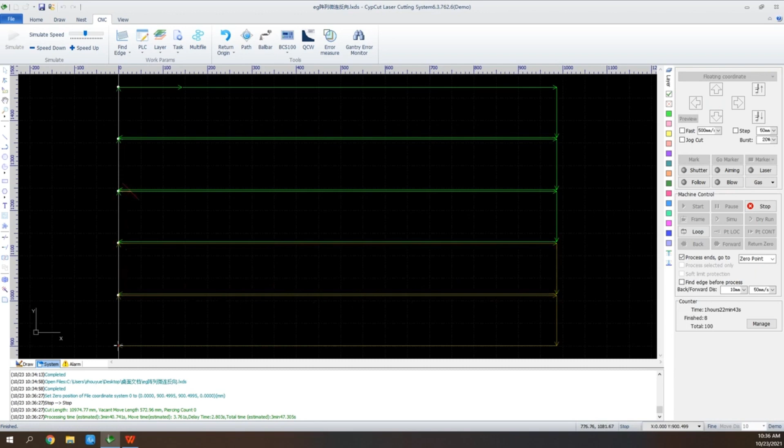We use the reverse to change the direction of the cutting path. So now, as the sheet gets better support, it will stay steady while being cut.

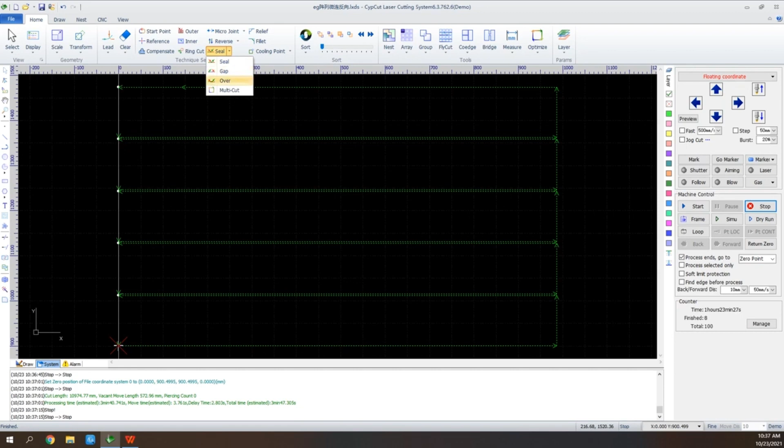Down below, this is the gap feature here. In the drop-down menu, we can see the gap. Select the graphic and click it when we need to set a gap at the end of the cutting path. Here is the gap. On the contrary, we can seal the gap if we don't want it anymore.

There are also overcut and multi-cut. Overcut is for making sure the whole part was machined, and multi-cut is for an obvious marking.

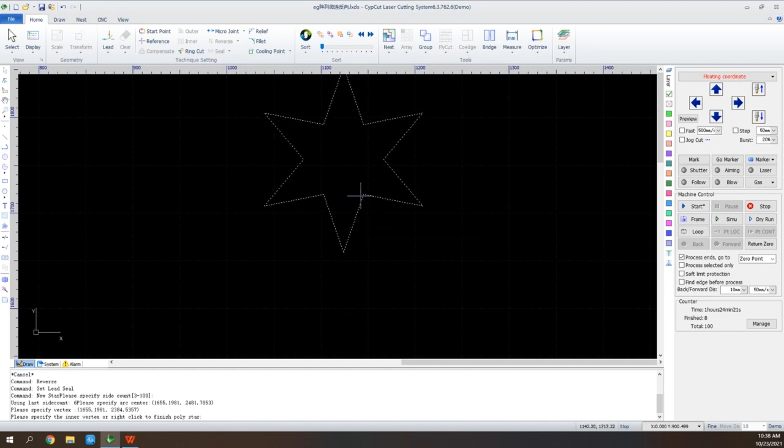Sometimes we need to cut graphics with a sharp angle. To ensure good performance, we use the feature ring cut. As always, we click to set parameters accordingly. Now we get the ring cut.

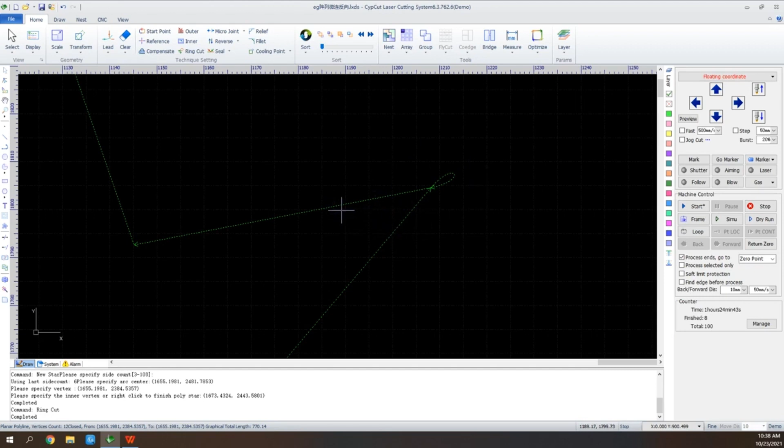And when it occurs to parts with a corner to be bent in the next step, like a standard part like this, we can set relief angle here, manually.

And this fillet feature is different from the one at the bottom left. We can add fillet one by one according to needs.

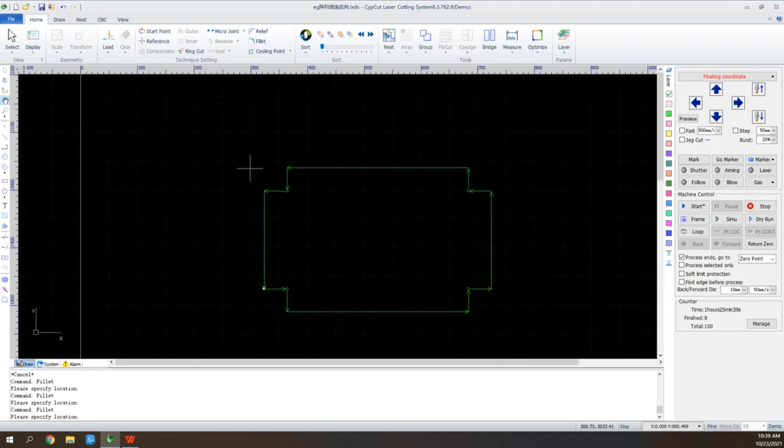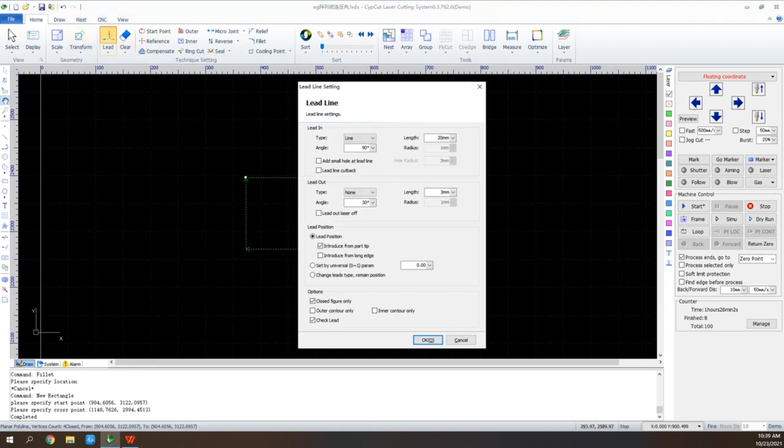When we cut thick plate, at a corner of a graphic or the lead-in, from the tip we need to get the laser off to stop cutting and blow to cool the point in case the part gets melted.

So we can use the cooling point feature. We've got two ways: automatic cooling point and manual ones. Choose auto cooling point, and we'll get every corner and lead-in position a cooling point.

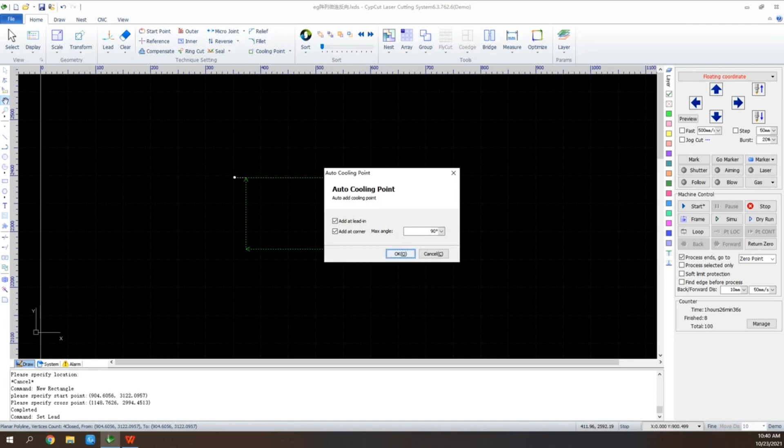And if we click this clear cooling point, all but the one at the lead-in can be cleared. This one needs to be cleared manually.

So we click the icon again, press Shift, and click to clear the point.

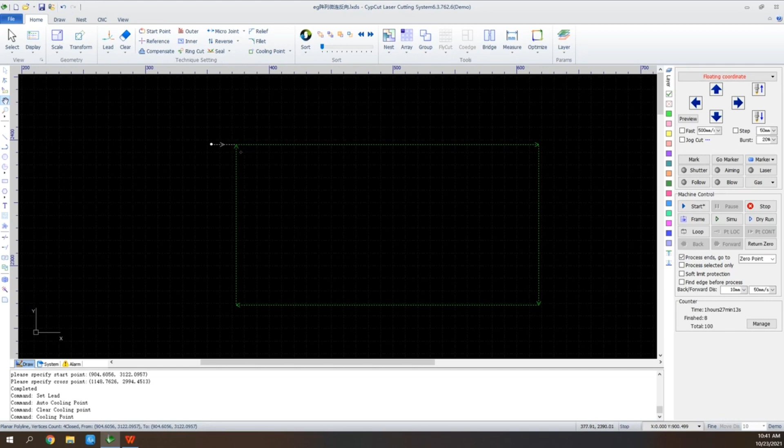And at the end, let's focus on the reference point. As we can see, on the machine panel, the red cross represents the position of the cutting head at the moment.

The white cross is the mouse, and this one is the reference position. The reference point means the position of part 0 in relation to that of the whole graphic.

When we set the reference point at the bottom left, the graphics will show at the top right of the point, as we can see here. And in the floating coordinate mode, the cutting head and the part 0 position is at the same place. So the machine process starts at the top right.

If we set the reference point at the bottom right, the machine process starts at the top left of the point.

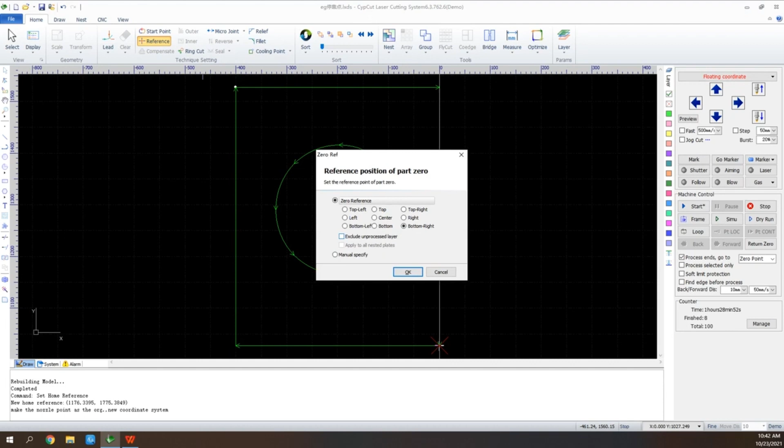There we've got exclude unprocessed layer. For example, there we have 2 graphics. And we now set the rectangle as not processed. And we check this box.

The reference point will be at the bottom of the circle. It means it will start cutting from this circle instead of the rectangle.

And though we can manually set the reference point, relative zero reference is the common choice. The floating coordinate working with zero reference can realize flexible production.

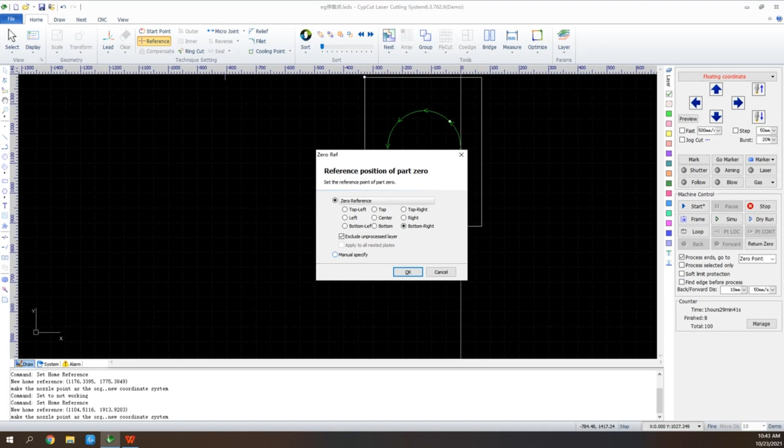So that's for today. We've learned the features in view, geometry, and the technique setting modules, and we know how to draw simple graphics. Remember to practice. See you next time.

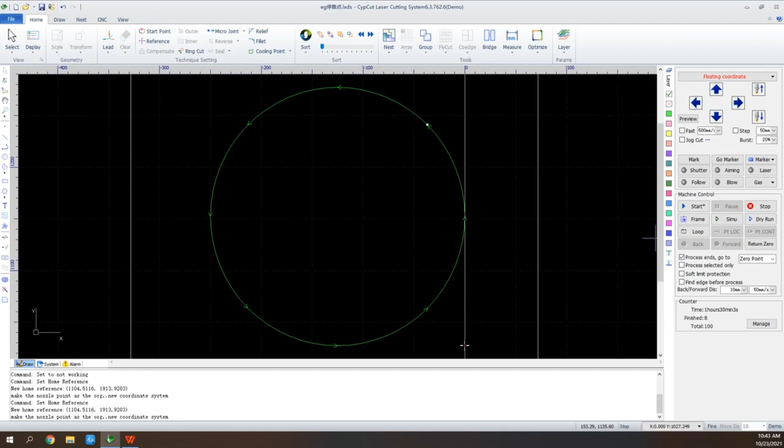Last time we learned about how to draw simple graphics, set cutting techniques, and functions in the view and geometry. Today we will learn the ways of sorting sequence for different graphics and the tools that help to get a better cutting performance. Without further ado, let's get started.

Now see the sort module. We've got all these 11 ways of sorting: grid pattern, local shortest path, cutting die pattern, smaller figure prior, radiating outward, left to right, right to left, top to bottom, bottom to top, as well as clockwise circular pattern and counterclockwise circular pattern.

In general, we choose grid pattern. Left, right, top, bottom — these 4 types are mainly used for cutting well-arranged graphics.

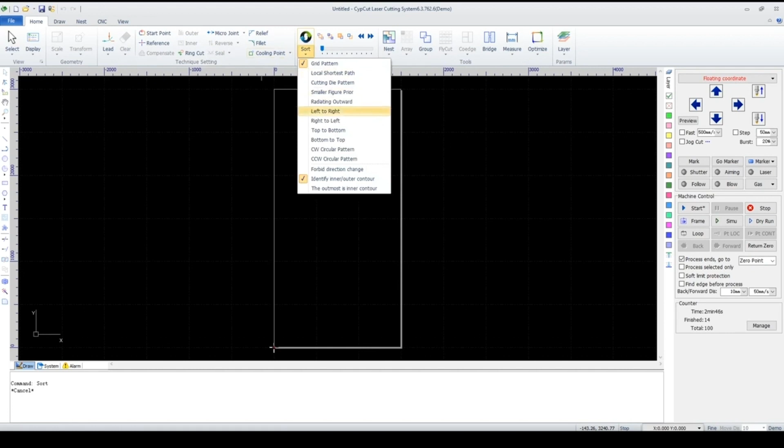For instance, the square matrix: select them, choose left to right. And we can drag this progress bar to simulate the cutting path. For this we can get parts cut within a rather regular and short travel path.

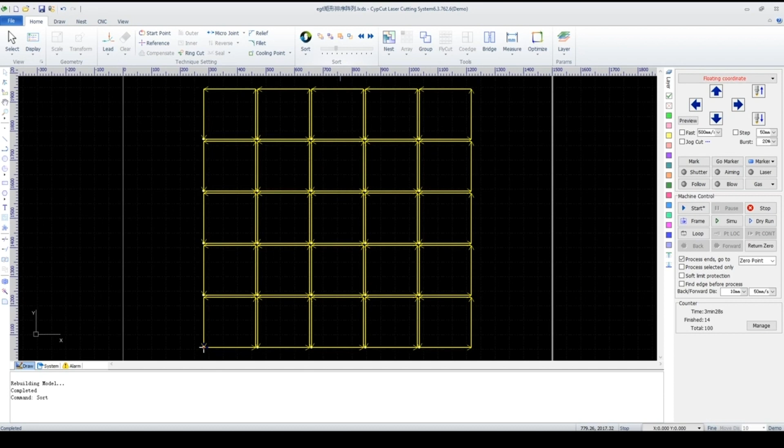However, there would be too many unnecessary travel paths. When we cut this kind of graphics, as we can tell, if we use these 4 modes for an annulus, this is inefficient.

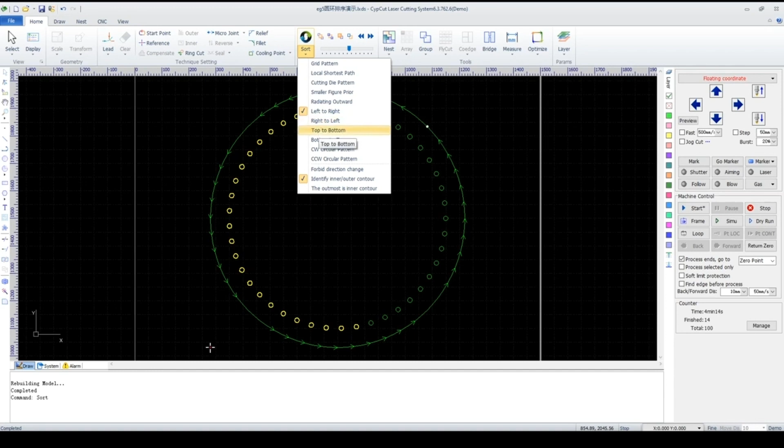But radiating outward, clockwise and counterclockwise are just perfect for annulus patterns. This way we can skip over unnecessary travel paths and hence improve efficiency.

And here we've got 3 other options to be chosen as needed.

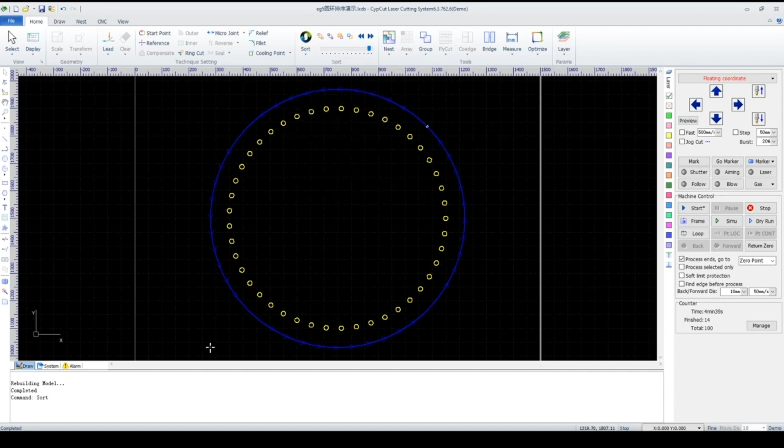These 4 icons above are used to manually change the sequence, like set a first to get processed, or the last. These are for the sort module.

CypCut supports a simple nest function as well. We've got nest here besides the sort module.

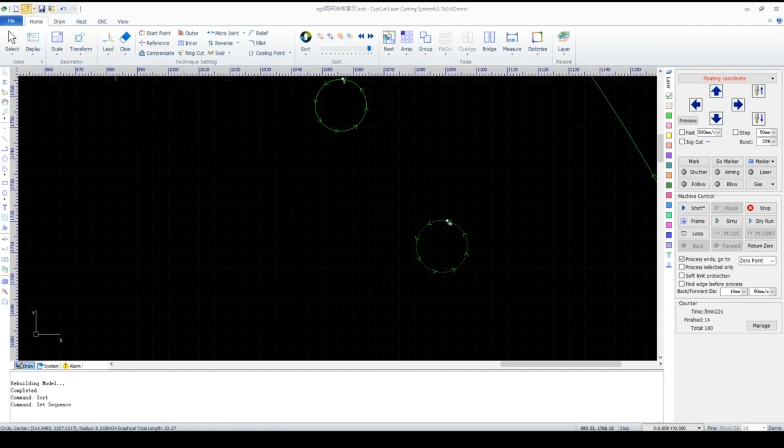First of all, we open a file that needs to be nested. Select the parts, right-click to add them to the part list. Input number, key in number, say 50.

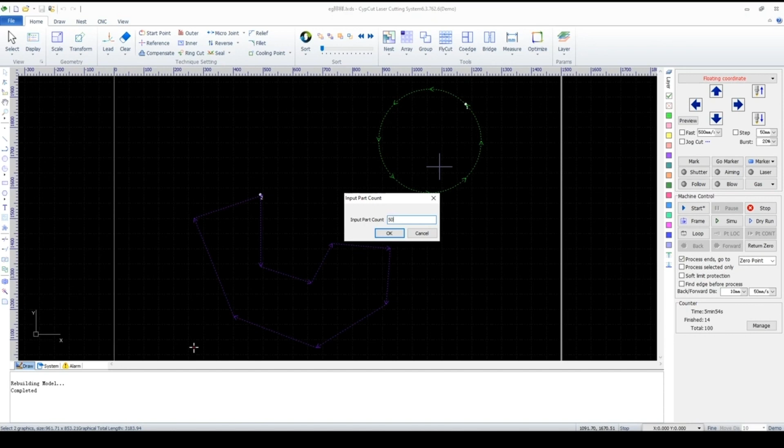And the parts will be in the list. Select the parts, and we choose the nest, and set up the parameters, then OK. We will get the nesting result.

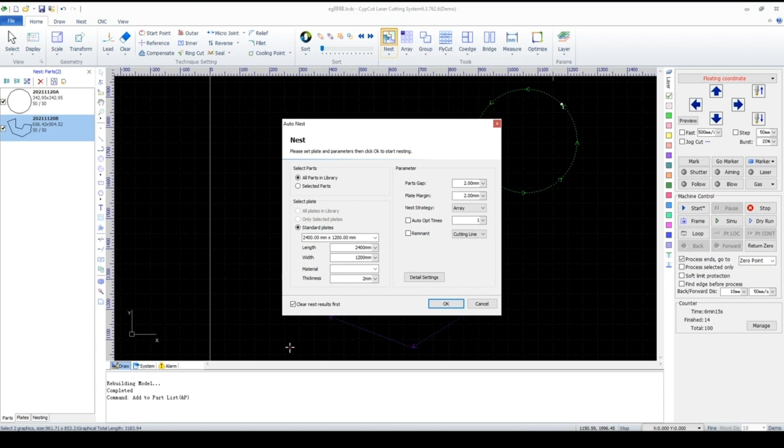But please note that for this nest function in CypCut, it's just at a basic level, so it supports only 50 kinds of parts and results of 20 plates at most.

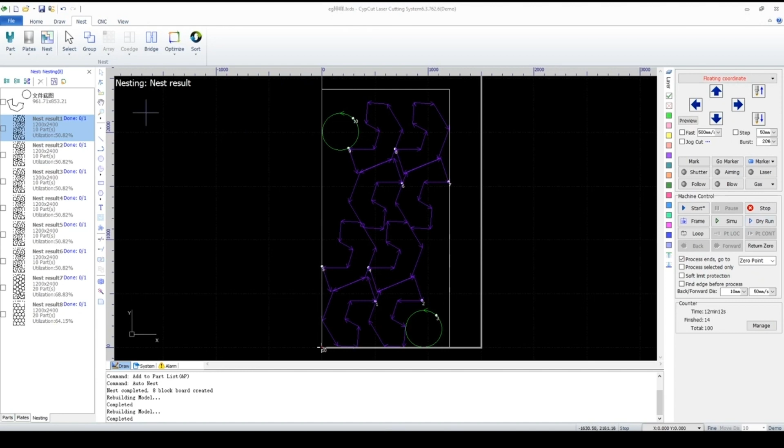Array here, as its name implies, we use it to generate the same graphics. Let's draw a simple rectangle, for example.

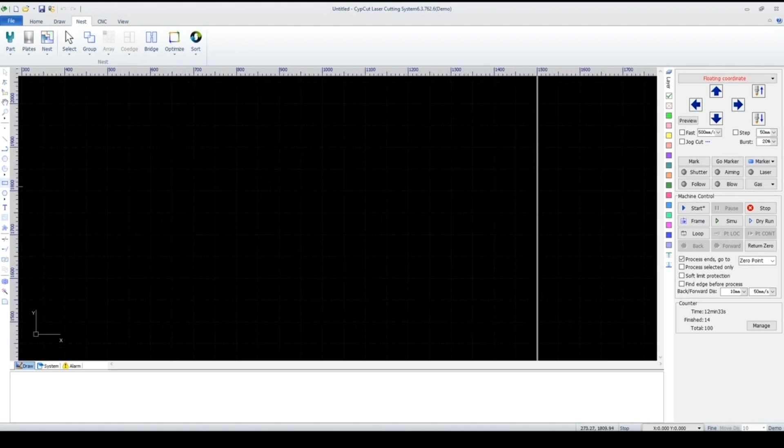We click Array, set the size, and layout and row direction, and we can get the original graphic arrayed.

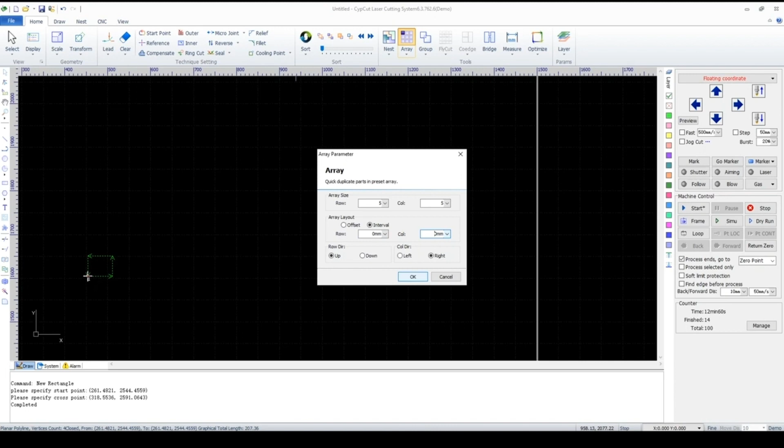The second one is dynamic array. Also, we first draw a simple graphic and choose the dynamic array.

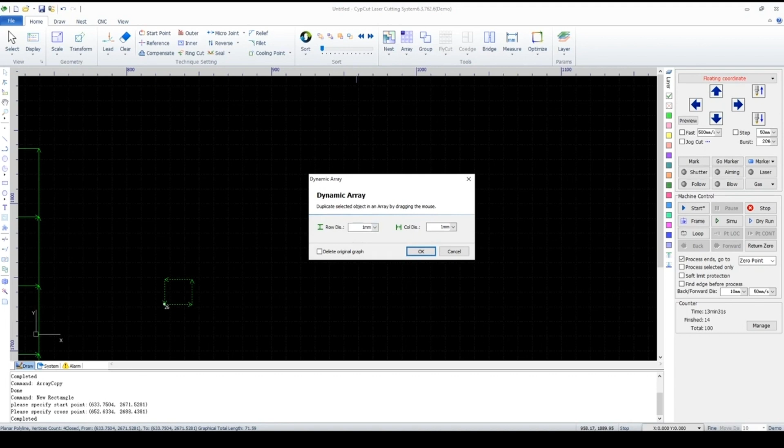Set the row and column distances, and we hold the left button on the mouse and drag to the direction, the start point direction, as well as where to stop, at our disposal.